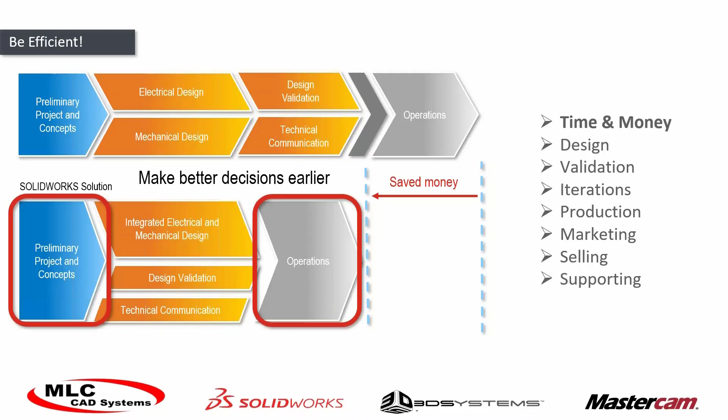There's actually more benefits to that when it comes to PDM. I'm going to show some simulation today too, but I want to start with data management because it's such a big fundamental topic, and I feel like every SolidWorks user should feel the same way about data management that we feel about parametric connected data. It should just work seamlessly, never a question of who's working on what at what time, or who has access to what. So I want to start by talking about what data management is.

When you hear the acronyms PDM, PLM, ERP systems, I'll talk about what those fundamental things are to me as a CAD user, and then some of the key capabilities and benefits of SolidWorks PDM—that's the product I'm talking about today. Then I want to show you a live look at how it works while I make some engineering changes to things.

I'll look over the questions at that point, maybe summarize what I've covered, and switch into simulation. I've definitely brought a lot today, so I'll try not to go over an hour here, but no guarantees on that.

So let me start with what is PDM. To me, the most core functional need of a PDM system is addressing what happens when files are shared across a network drive at a company. If you just have a network drive that everyone's opening files from, you've probably already run into read-write issues and other collaboration issues there.

What happens is when you take something off a network, that data gets broken down into packets—kind of like the Willy Wonka kid who got beamed into the TV—and then it gets reassembled on the other side. Well, what happens if the power goes out while that kid's halfway in the air? Only his legs show up in the TV. That's data corruption. It doesn't matter what type of data you're working with—that's a common way to get data corruption.

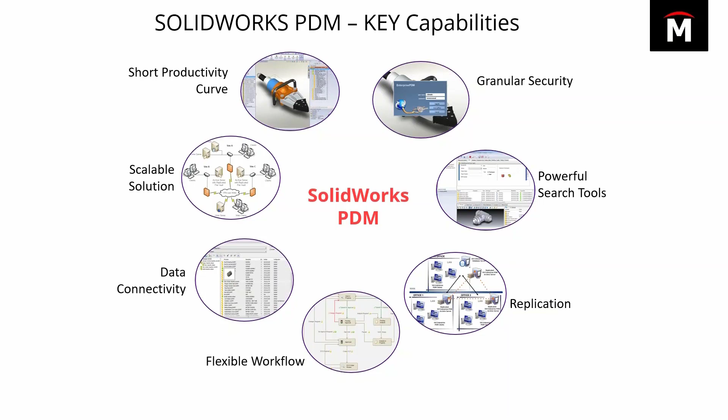So there's a few capabilities I want to go over before I get into a live showing of this thing. And there's a key takeaway in each one of these areas.

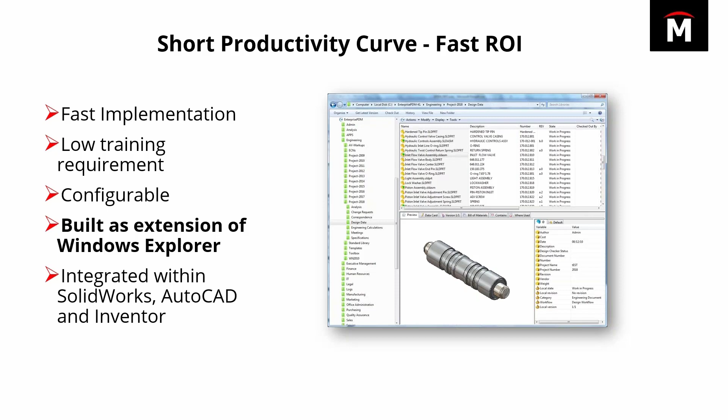Starting off with your rate of return here, your fast ROI, or just your learning curve too. If you do give this out to different users who maybe are not even in SolidWorks, well, this is built in as an extension of Windows Explorer. So it looks exactly like a folder. If you're sharing on a network drive right now, it's going to look just like that, even though really there's all this local caching and database functionality. So it's just an extension of Windows Explorer, meaning people are going to know how to use it pretty much on day one.

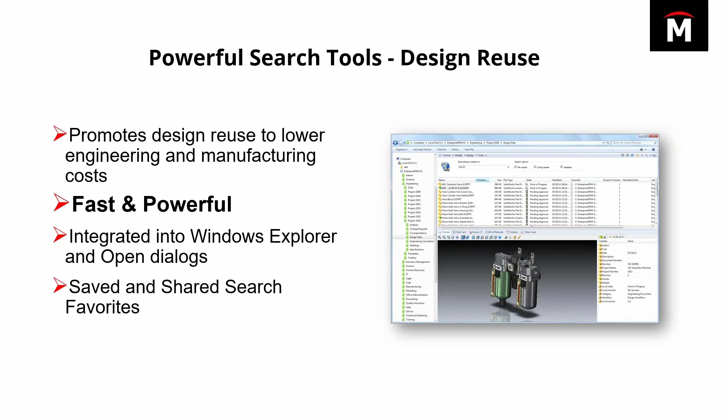Now, what I really like about it is the search tools. If you've ever worked in Windows Explorer and just done a Windows search, it's not very effective. It's pretty slow, and it might take you to Bing. Well, because this is built on top of SQL, the searching is immediate. This is something I've got to show you today. The searching is super powerful, you can parse data through all sorts of stuff. So in Windows, I generally just browse for files, but in PDM, I really take use of the powerful search capabilities.

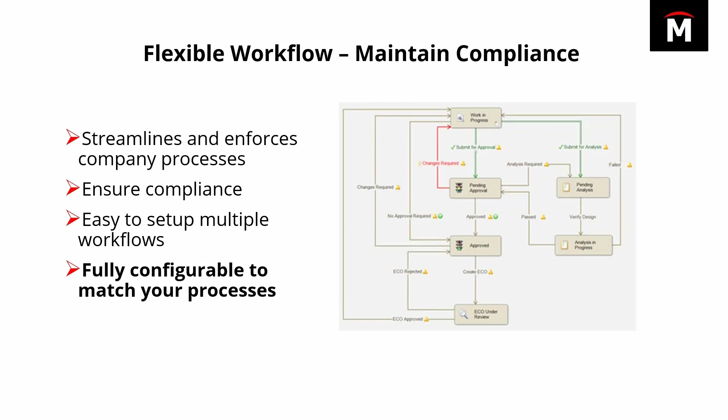Now, a big reason to come to PDM is this revision control, and workflows are completely flexible here. So if we take even a PDF, what does it take? Who needs to sign off on it to approve it? Once it gets approved, does it go into an approved folder? Do PDFs automatically get sent out to the shop floor? We might have different workflows for how we want to approve different types of files. For instance, maybe you have an engineering change order process in your company. Certain people need to sign off, certain people need to attach Word documents along the way. This is a completely flexible and configurable workflow to manage this type of approval process and revision flows.

And as I mentioned, this is totally scalable. Whether you just start off with SolidWorks PDM Standard because it came with SolidWorks Professional and Premium, and you want to jump into PDM Professional down the road, it's just like flipping a switch. Or even if you go to PDM Pro and you have multiple sites across the world, you can do server replication over there, so nobody's ever waiting on data transfers.

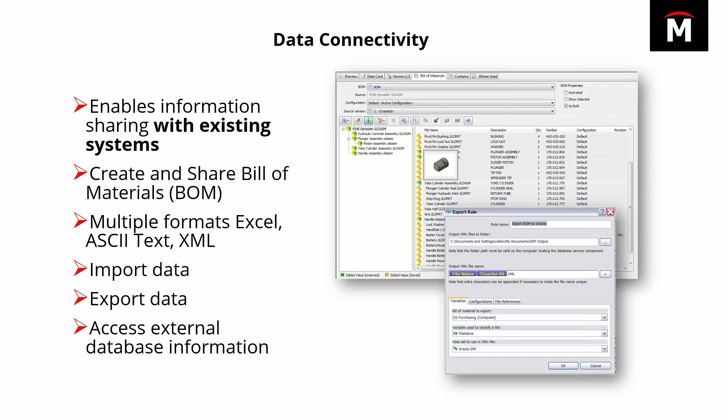And of course, because there are these other systems, maybe you have a legacy PDM system, an ERP system, a CRM system out there, we can tie into these things, and that's part of the implementation and customization that comes with this stuff. So not only could we kick out the information and share it to others, with PDM we can build hooks to pull in from existing systems and really help with that whole migration process, if you just want to bring everything over into PDM from some legacy system.

Of course, along the way, one of the great reasons this is something you control and is locally installed is the granular security nature of it. At user levels, at groups of users levels, even on folders, who can see what exists inside of them. So really, this is completely up to you. The control here could be met to any security guidelines. If you have ITAR restrictions, no problem. This is a complete control system that you set up to the security level for any user that you need to.

So these are just a few of the key capabilities I wanted to point out, the ones that come to the top of the list for me. I think it would probably help everybody here if we just take a live look at SolidWorks PDM and you can really see what's going on. So I'm going to switch over to SolidWorks.

Here I've got an assembly open that I want to work with, and this is something that's inside of PDM. I just open it up like a regular SolidWorks file. Right now it opened up read-only, so when I open it, it's just letting me look at it and view it, but somebody else could be working on this thing for sure.

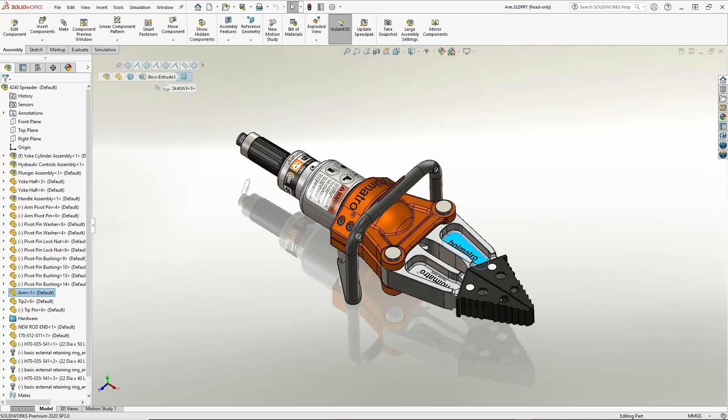And I want to make some changes here, so I'm going to open up a part. Let's take this gripper arm here. Now, I call it the gripper arm. What you're seeing here is essentially the jaws of life, but it's kind of a reverse jaws of life. This thing is used to spread parts around. Like if you have a car that's rolled over and you need to spread a space and open it up.

And when I try to open a part out of it, it's actually warning me already, you're trying to make changes to a read-only document. It's even a document that I haven't yet saved in SolidWorks 2020, but it opened it up. Open up read-only lets me look at it.

To actually make this change and look around, I'm going to use PDM running inside of the SolidWorks task pane. This is called the PDM CAD editor, and it tells me what files I've got open, what version it's in, what state in the workflow. It's an under editing workflow state, so you could make changes to this file.

And all I need to do to take control of it is just choose checkout. When I check it out, it now says, hey, it's checked out by me. Philip's got it checked out. It's no longer read-only, and other people are aware that I'm working on it now. Nobody else had it checked out, so it's just mine.

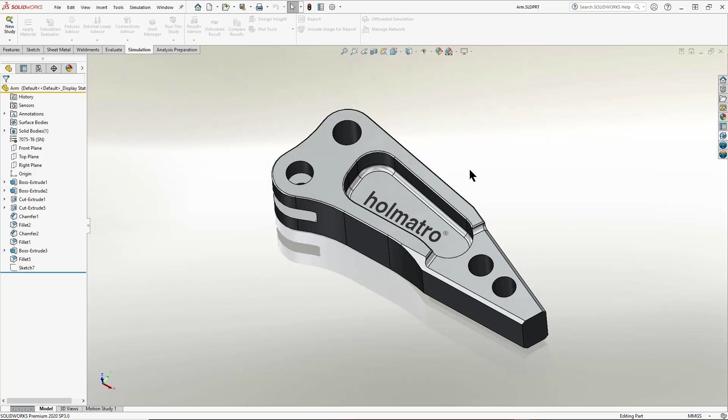So let's make a change. And I'm going to be fancy here. I'm going to use Instant 3D and just make a slick change here to make this a little bit thicker. That looks pretty nice. I think I'm okay with just that thickness. That's what I wanted to make.

So if I check my task pane again over here to share this with others, I really just need to check it back in. But before I do that, I'm going to do something that is just a PDM functionality. I'm going to check the where used information. Now, you might have seen this stuff before, like in file references. This is kind of the backwards of file references. If I'm modifying this arm, well, I'm going to be affecting this assembly and the drawing of that assembly. It doesn't look like there's a drawing of just the arm. So I know, okay, those are the other places I'm going to need to make some changes.

I can handle that, and I'm going to go ahead and check this thing back in. I'll leave a note for someone in the future saying I made the webbing thicker on this part right here, and I'll check it in. It's now transferring those changes back to the server.

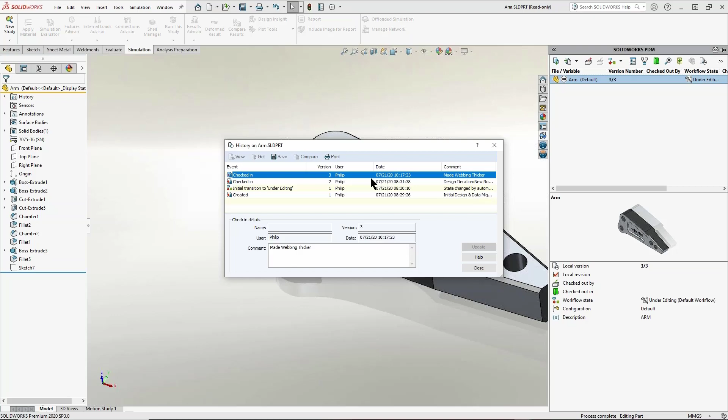It's created version 3 of 3. You can still check it out and make more edits, but now anyone could come in here and look at the history of this file. I can see when it was created and the notes left with that, and I can see it was checked in just now by Philip, and he wrote 'made webbing thicker.'

That's pretty interesting. In fact, I could roll back the clock and look at any of this stuff. I could say, take me back to version 1, go get version 1 from the vault, and let me see what that looks like.

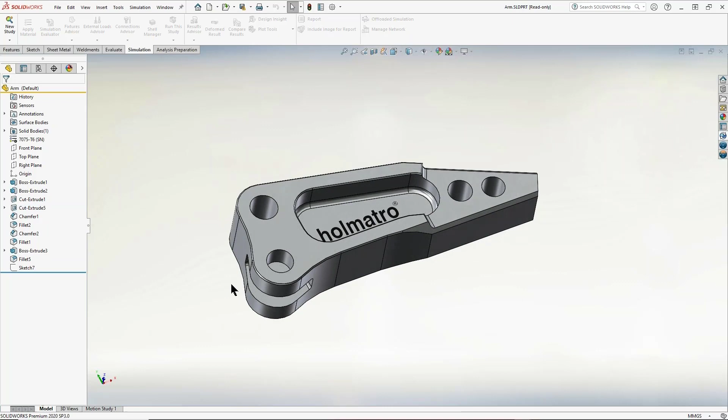And I can see the webbing was thinner, and actually on this type of part there was an angle over here that was much smaller. It didn't have enough clearance to fully open and close those jaws. And if I'm looking at my PDM task, I get notifications that tell me the file I'm looking at is older than the latest one.

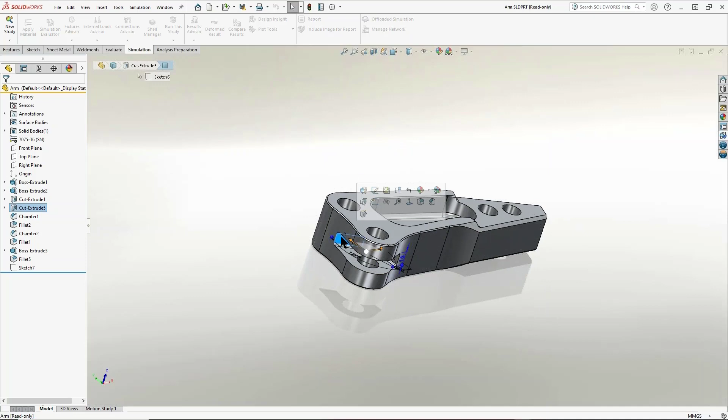You might not want to work with some old files from way back, but I can just go grab from the server, grab from the vault version 2, and let's see what that looks like. I can see here the clearance has been opened up — they got about a 120-degree angle now inside of that opening.

But of course I'm just going to hit the latest version and grab that one from the vault, because it's most common to work with the latest version of any file, and that's what I want to be dealing with. So I've checked something out, made a change to it, and checked it back in. You now know how to use SolidWorks PDM — that's the end user learning that needs to happen for a SolidWorks user.

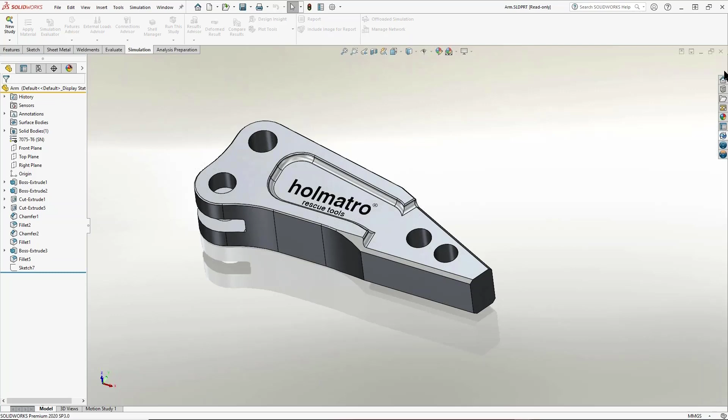I used the where-used functionality there, and I noticed this part is used in an assembly and a drawing, so that's what my changes are going to affect. So let's close this and go back over to the assembly — I can see, yeah, I would have made a change here. So I'm going to check this out too and make some more changes on it.

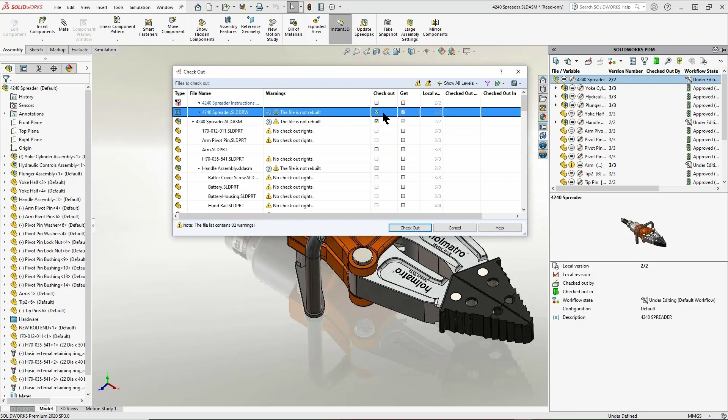This time I'm doing it on a right click. I'm opening up my task pane, and I can see all sorts of information. The assembly is in a state that I can edit it, so I'm going to check it out. And because I saw that drawing, I'm just going to use the dialog to check out the drawing at the same time, since I'm going to end up needing to edit that too. I'll just hit check out. Now I can see just this top level assembly is checked out by me.

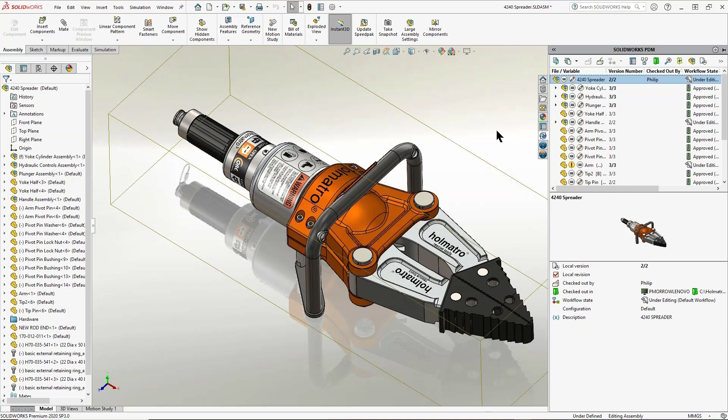Other people could be working on these files. Many of these files are actually approved, and in that case you wouldn't be allowed to edit them because they're already released for manufacturing — you'd need a Rev B. I can see one here has had a change on it; I could review that. But let's make some more changes to the top level assembly.

All right, one of them is — how about this pin in here? I know there's a couple pins. I'm going to choose a different pin, maybe something made out of steel. So I'm just going to delete these out of here.

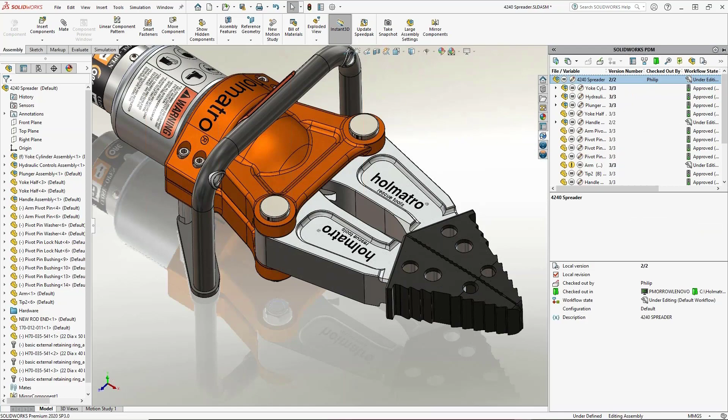Now, I mentioned that this is all built on a PDM database, so searching is much better than Windows. I'm going to use the PDM search right here and search up a new pin. This is what it looks like if you're using the CAD editor — I'll maximize it so it goes full screen. I'll even just go by description, type in 'pin,' and instantly, no matter how big my database is, it comes back. All these things had pin in the description, and you can dig really deep on pieces of data like this.

For instance, let me show you data cards—this is searching descriptions of files by name and location, they're in my vault. I'm going to go to cards. Now for every file extension, every piece of data, we might have a data card which stores the useful information that we want to know about that type of file.

For instance, I'm going to go down to SolidWorks parts, SLD PRTs, and this is what the data card looks like, also customized for me. On a SolidWorks part I always want to see really quickly part number, description, and here's one for material. So I'm going to add 4340 in for material, and it parsed it down and said with pin and description made out of 4340, which is just a part of actual material named steel, we found this one hardened tip pin.

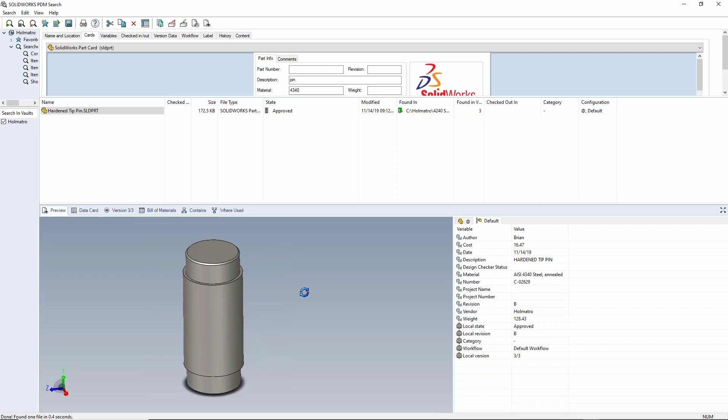When I click on that pin down at the bottom, I can see more information like where used info, the data card of that pin, what it's made out of, who created it. I've even got a preview window here, which just has eDrawings built in—the free viewer. So I can roll it around, I can measure it, I can make sure yeah, this pin seems like it's going to work.

And because we're using SolidWorks, I'm just going to drag and drop this guy into the design. That's always a nice way to use SmartMates too, is drag and drop from one window to another—could be Windows Explorer, could be SolidWorks, whatever. So I searched it up very quickly and found the pin I needed.

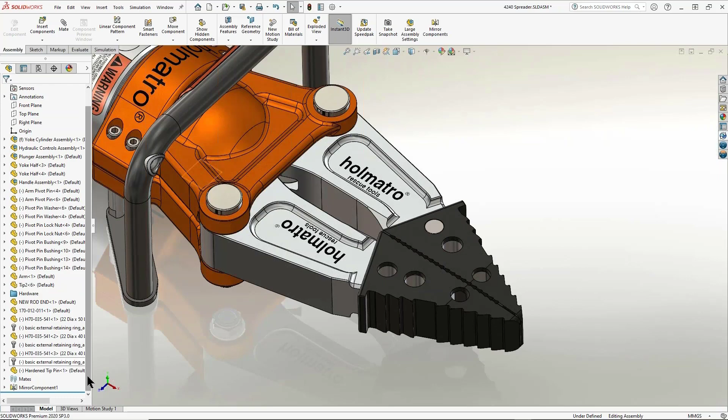Now I do know in this file that there is a mirror component inside of here, and I want this pin to be included in that. So I've got a pin on either side of this thing, and it's looking pretty good, it's looking good to go. That's really all I wanted to change here.

I searched something up, swapped it out, but I know from the where used info that there's a drawing of this that I need to change as well. I could open the drawing just by right-clicking in the tree, I could grab it from the PDM task pane, but I'm going to use File Open here because I want to point out to you guys that this is built into Windows Explorer across the board.

So even when I hit File Open, all I'm doing is looking on my C drive, and I have a vault here, and it looks just like a folder. When I open it up, here's my vault, it's got a folder structure inside of it. Here's my assembly, so I can see the data cards of it, what version it's in, who has it checked out right now, which is me. And I'm just going to grab the drawing and open that up.

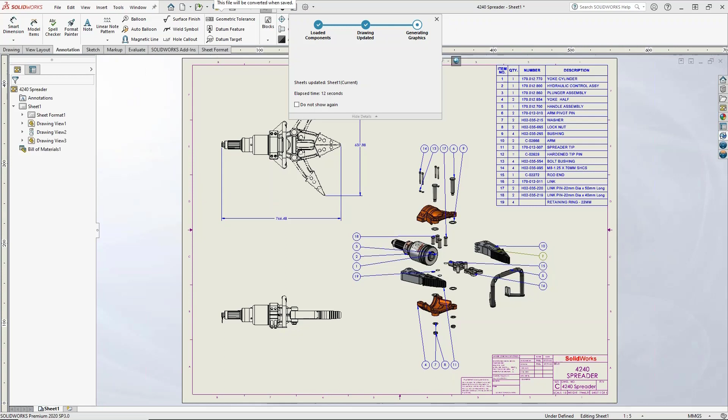There's very little new to the interface here. There's a nice task pane pullout for a SolidWorks user to get all the info you could want inside of SolidWorks. And there's the need to know that you need to check in and check out, maybe hit where used, but pretty easy to use if you use SolidWorks.

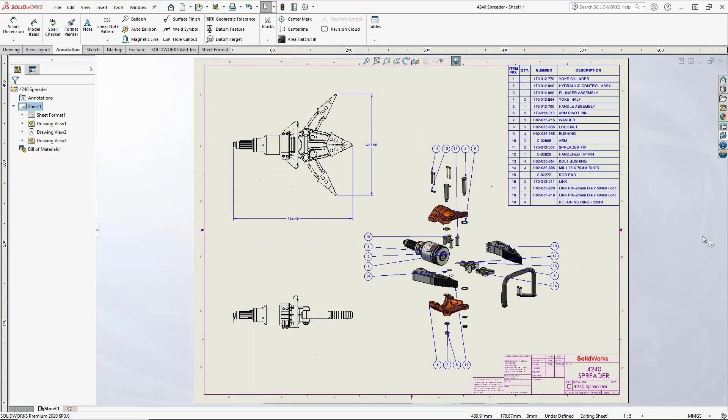And I can see here, okay, I did break a reference because I swapped out that pin. So I'm just going to reattach this balloon so it gets a nice item number. Honestly, I should have changed an exploded view and exploded those things out, but I didn't—yeah, that's okay, I'll leave it like this for today. I can see a part number on a retaining ring needs some help. Let's just say that's good for our changes right now.

And I'm going to take this drawing and just check it in. I'm going to say I'm done. Let's release this file so that other people could work on it as well, and I don't have it just reserved and checked out to me. And notice it's also checking in the assembly that I had checked out at the same time—so that's kind of convenient. I'll leave that checked on.

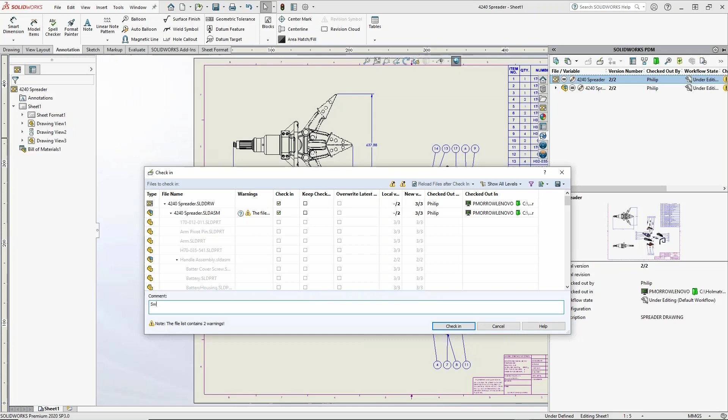And I'll say I swapped out a pin for steel. Right, so I got a history. Of course it's going to know what user did it and what time of day and all that stuff, but I like to put a nice traceable history there that people could look at.

So I saw a few things that changed, but I'm pretty happy with this drawing, this assembly. I want to release it to manufacturing. I want PDFs to go out to the right folders, and I want managers to approve it, all that good stuff.

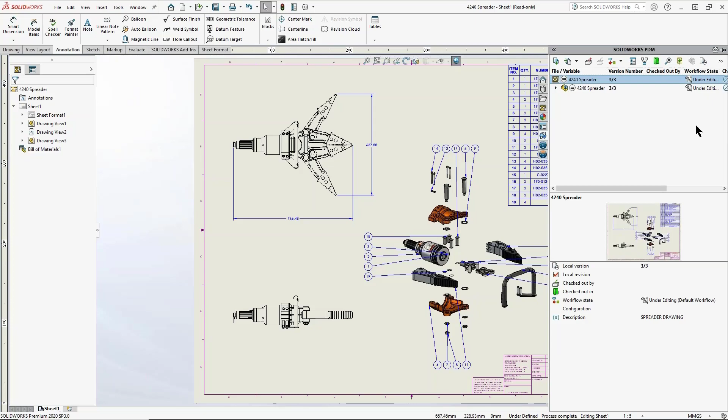I could do that here in the task pane, but you've seen me work here a bit. I'm going to show you how to do this kind of stuff just from Windows Explorer. So I'm going to close these down and pop up a regular File Explorer, and maximize it. It's just my computer.

Now my C drive is where I've got my folder for my vault, and inside there I've got a project folder for this spreader arm where I can see my assembly and my drawing. I've made some other work ahead of time too - I made a new part, a rod end, and a drawing of that rod end. Here you can kind of see what this rod end looks like that connects things together.

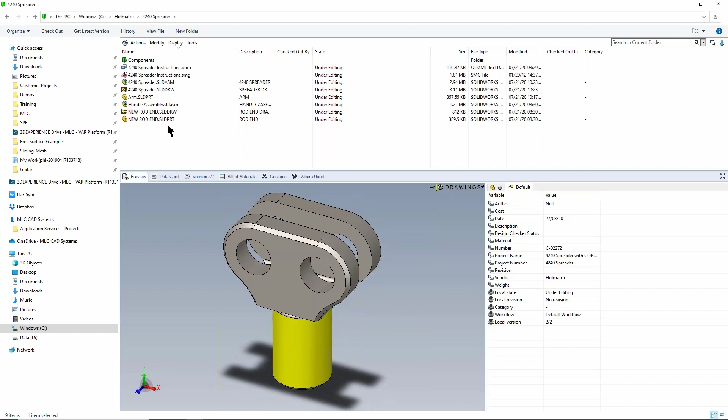Along the way we also changed the range of motion those could open up by increasing an angle. So I'm going to take all of these components here, right-click them, and say submit them for approval. I want people to stamp these Rev A if they're new, Rev B if they're moving around, and I can leave them a comment saying please approve this work. I never make mistakes, don't even check.

And when I say okay, I'm now kicking this off to be approved by a manager. I almost forgot about this - I actually have an automatic task set up for myself. Whenever I submit a drawing through the workflow, I have the design checker set to run.

If you don't use the SolidWorks design checker, you ought to look at it. It can learn from a current drawing all the things about that drawing in terms of arrowhead size, font, and all the things that should be a standard. So I can run it to make sure I didn't use Comic Sans somewhere on this drawing. But I'm not going to run that - I'm going to hit cancel and just let it move forward.

So now all of my different files are sitting in the waiting for approval workflow state. I mentioned workflows earlier, so let me show you the simple workflow I'm working with. It's pretty simple - those files you saw me checking out and checking in, they're sitting in a state of this workflow called under editing.

A lot of people call them WIP, work in progress, I think. Under editing is what I've got, and I've got different groups of people that could do different things. An engineer with a file in under editing can do just about anything to that file. Same with managers, definitely admins, but maybe somebody from the documentation group can only come and read the file contents.

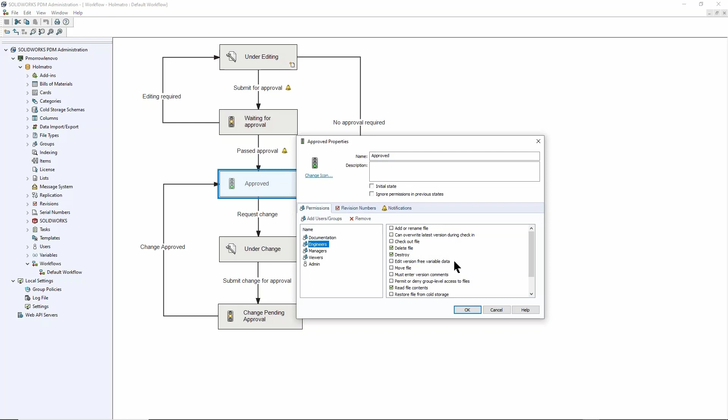And then it can sit in the approved state. Engineers can't do too much with the file once they're approved. Perhaps another task runs to put PDFs in the right folders at that time, until some manager comes around and says, hey, we need a change. And then we can go to change pending, put this under change, basically bump the rev to Rev B.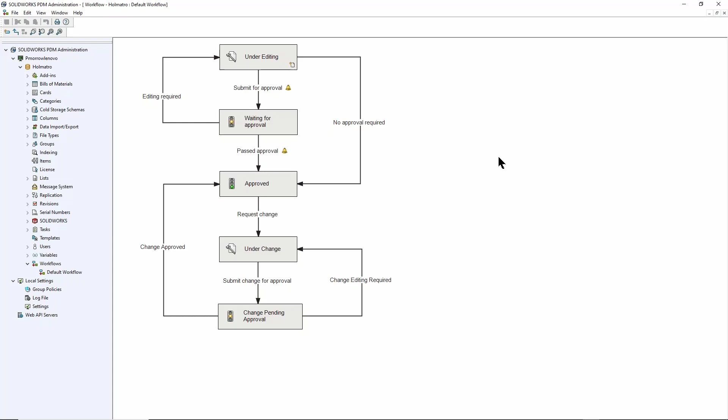So as you can imagine, there's a lot of workflows you could have here. You can have them for different file types, and you can have different parallel and serial workflow structures, but this is the simple one I'm working with.

So I'm going to put on a different hat here. I'm going to log out - let's do this for my task pane. I'm going to log out of PDM, and then I'm going to log back in as a manager.

You can do this in the task pane, or if you just click the folder in Windows Explorer. I'm going to log back in as my manager, so just kind of changing job duties right now. And as a manager, you have a couple of choices.

Waiting for approval could have sent him an email to his Outlook account, or there's actually an inbox inside of PDM. We could have sent a notification over here, so as soon as he starts up his computer and logs in, he can see anything that's waiting on action for him.

Same with a simulation user, right? If they've made a design change, maybe my simulation user needs to be notified, time to run a new sim, or somebody in technical documentation needs to update the images. Just hit update in Composer and bam, tech docs are up to date.

But I'm going to stick with my manager's hat. I'm going to get back into my vault. I didn't set up a notification in my inbox. Instead, I'm going to go back to that search tool. I mentioned the search tool from inside of SolidWorks. It's here in Windows Explorer as well.

Looks pretty similar. This time, instead of searching for files by name, by cards or custom properties, or who's got it checked out right now, or is it Rev A, or history—there's so much you could customize and search for—I'm going to search through the workflow. I'll say, just show me files that are currently waiting for approval. That's it, that's my job. And I can see there's a number of files here waiting for approval.

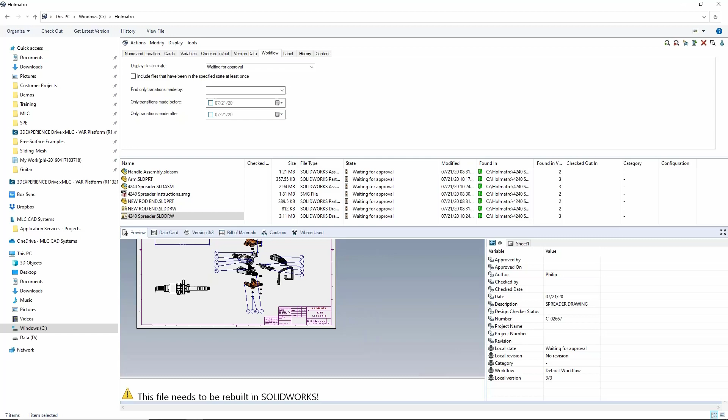So you can't ever blame your managers anymore for moving something around, or somebody going, hey, well, I just rebuilt it and changed it. It's like, no, that's okay—they don't even need to open the actual file up. They can preview it here.

And I'm going to say, as a manager, I know Philip, he really doesn't make mistakes, he's amazing. So I'm just going to go ahead and say change state. As a manager, I can say this stuff all passes approval. Except maybe I won't pass that SMG, that Composer file—technical docs need an update on their images, I'm sure.

So I'm going to say, good work, Philip. You are my number one employee. I'm sure a Christmas bonus is coming this year. I'm going to hit OK.

And now all these are transitioning into the approved work state. I can actually see it already here, except for my spreader SMG document that I chose not to approve.

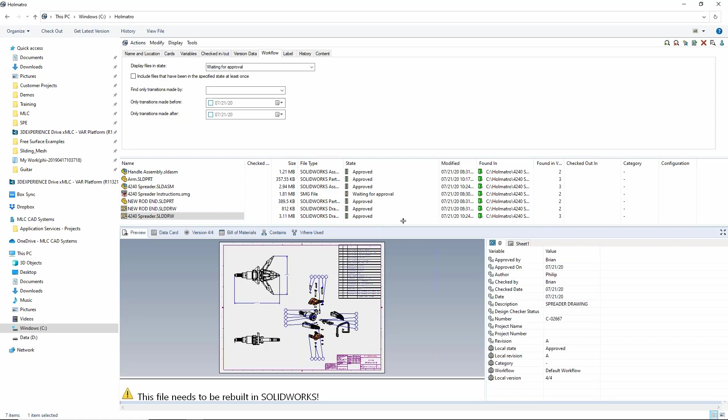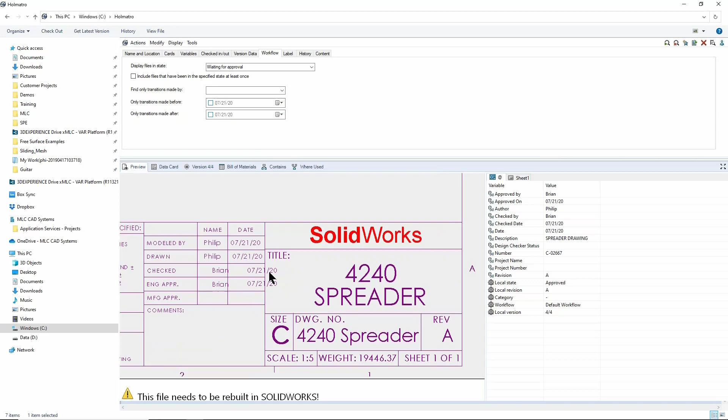So let's take another look at that drawing that I just approved. Make it a little bit larger inside of here. One thing I want to point out, while my notes need a little bit of adjustment on my template, I'm logged in as Brian on today's date, and I just approved this thing. It got stamped with my name, and it got stamped with Rev A.

So not only does my manager not need to open my file up and possibly move around something, they can actually approve this, get dates, get custom property mapping to it just from PDM. It's called attributes at this point, basically. You can type them into the data card just like you'd put a custom property into a file, or you can do stuff like this and just approve something, and bam, it's Rev A. As a manager, I don't need to even have SolidWorks installed to do any of those actions right there.

Boy, I think I just went pretty far through a workflow. I just edited parts, checked them out, changed them, edited an assembly and its drawing. I submitted all that stuff for approval. I took a look as the engineering manager and reviewed. I could even review the history. One last thing I may have wanted to do as a manager, or just as a purchasing person, is when I'm looking at an assembly like this that's changed, check out the bill of materials info.

I looked at where-used info and contains info, so I could see when I affect a part, does it go other places? Bill of materials are hand in hand, right? So I can see, okay, this is the current bill of materials here.

I could export this to CSV. You can make bill of materials that are named and just here, so we could add parts to it that engineering didn't think about, like some paint or tape or something like that. And I could compare a bill of materials. Let's compare this against the initially created one.